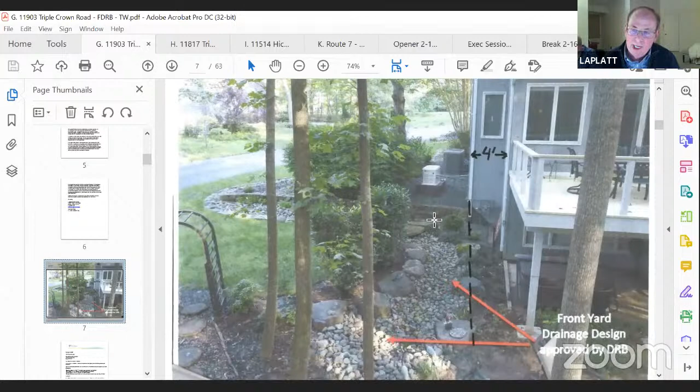And you will see that in August, to bring you back to where we were, on August 18th, the DRB heard our appeal of the panel decision regarding the location of deck stairs. It's the 5th time the DRB, 4 times in the 80s when this house and our house adjacent were built, the deck stairs issue and location was settled by the DRB, and it was supposed to be exactly where I'm showing it now. And each time the issue came back again, in May, when the panel first considered an application by the current owners who had moved in the year before to put the stairs on the other side. The panel took it under advisement and approved it, and we said that was wrong.

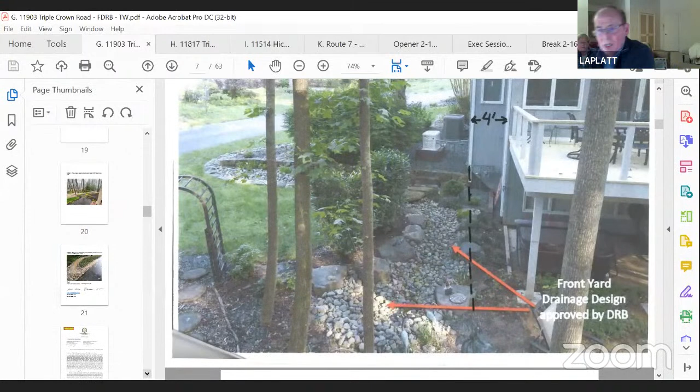On August 18th, the full DRB with you in charge, Mr. Wood, said in a resolution after discussion that the deed governed, and this was a settled issue. There were no changed circumstances. And so the McGurks should go back and redesign it to have the stairs where I'm indicating it now. Instead of doing that, the actual motion said: make a motion to ask the applicant to restudy and resubmit the updated design with a stair location on the west side of the property per the deed.

In October, the McGurks submitted another application, but they stood with a false statement that it was impossible to put the stairs 4 feet wide in a location where the DRB had mandated it now 5 times, including the August 18th decision. We then got a submission from Mr. McClarity on behalf of the McGurks.

This is his photograph showing supposedly the impossibility of locating the deck stairs there. We took that photograph and added the 4-foot notation per the plat that shows the footprint of the house, with 4 feet wide. There is no physical impossibility to satisfying the requirement of the settled issue of the location of the deck stairs on the west side of the deck, adjacent to the deck.

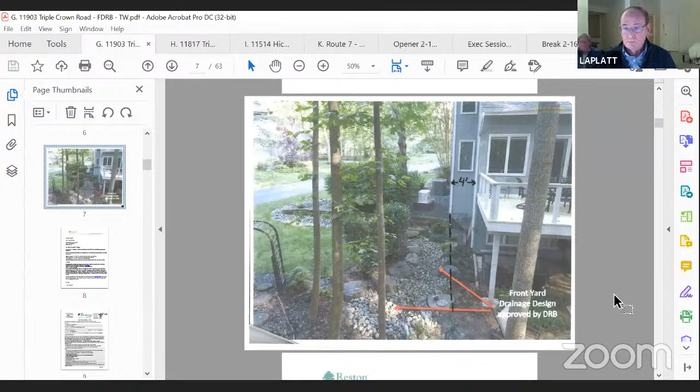Okay, thank you, sir. So to be clear, the new information — are you claiming there's new information that the steps could be constructed on the west side of the property? Is that basically what your new information is? Mr. Wood, at this juncture, absolutely, because the McGurks based their whole argument that it was impossible to do it at that location on the fact that it was physically impossible to locate the stairs there. And that literally is false.

And just a question — is this your opinion, or have you had an actual contractor or architect look at this to determine whether it's possible? We've had multiple people look at it, and you can look at it with your own eyes. That space is 4 feet wide. It's clearly not in the channel. There may be one or more pipes there, but they are outside the 4-foot dimension of every stair that's been proposed. You can see it with your own eyes — the facts are right there. And the restrictive deed is supposed to be respected unless there's a physical impossibility or massive change of circumstance, neither of which exists here.

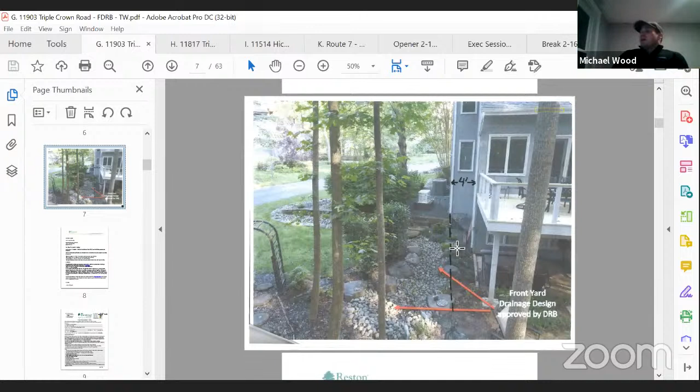So does anybody on the board, Mike B, do you have any questions or feelings about the appeal? I mean, I don't have any additional questions. I understand

the appellant's point. I understand what they're bringing to the table. And again, as the chairperson just brought up, it's a question of whether there was a design guideline misapplied or if there's new relevant information. I think we were aware of the dimensions in play. So I don't really have anything else I'd like to add at this time.

And sir, Dan, did you have anything to ask? Dan, are you on? Yeah, I see you there. I'm on. No questions. Okay. Karen, did you have any questions? No, time to move on. Scott, did you have any questions? No.

And then did Bruce join us? I'm sorry, no, he has not joined us. Okay.

So as an appeal, I understand that the way we reviewed this is that we reviewed it as a new application, and the argument is that a DRB application, we reviewed this as a new application, not as an amendment to an application that was approved 30 years ago. And I think that's how we looked at it when we did approve the deck as a design being aesthetically complementing the house.

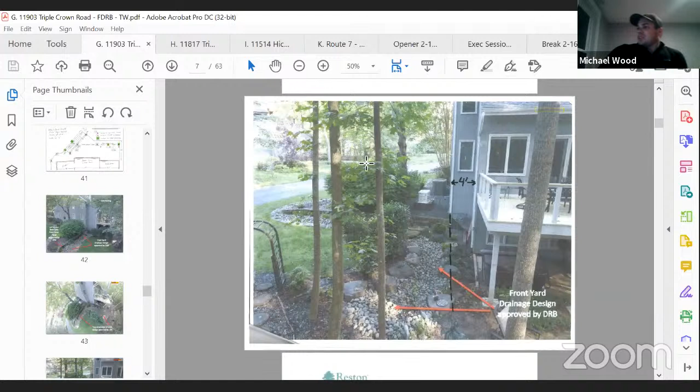So what's tricky is I don't know, reconfigure both the drainage swale and the deck stairs. Yeah, I mean, it wouldn't be. So I see it as new information that the stairs could be built there. I was always under the impression that they couldn't be, but is it really going to detrimentally turn the decision on the actual overall project design? Probably not. But that's all I have to add to it.

So does anyone else have any additional thoughts on it? All right, so let's take a vote. I will go down the roll call of what I have and take a vote.

So all those in favor. So Mike, are you in favor of the denial? I am in favor of the denial. Okay, Dan, are you in favor? I'm in favor of the denial. Yes. Karen? Yes. Scott? Scott, are you there? He's giving a thumbs up. Yeah, yes, I was muted.

Sorry. Yes. Okay. And I would actually vote no, just because I don't think it'll make a big difference, but I do think there was kind of new information, so I'll vote no against the denial of the appeal, but the motion still passes 4-1.

All right, so since the appeal has been denied, we will move on to the next application. Application H is for 11817 Triple Crown Road.

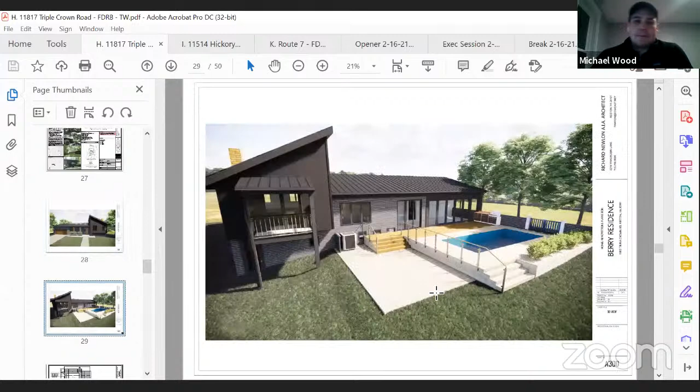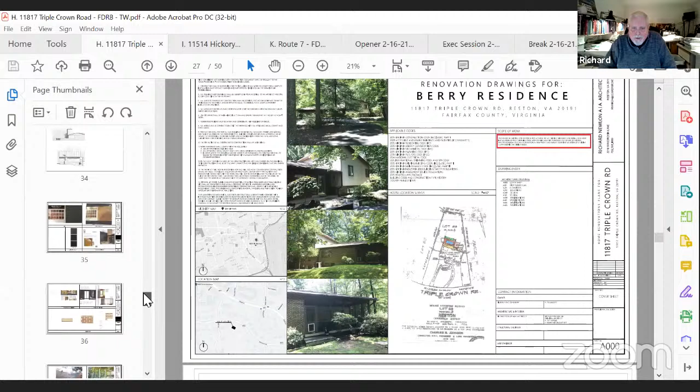We have a house here that was built in 1970. The Berries purchased it in 2004. Basically, nothing has happened to this house in 50 years, if you look at it that way. So there are two phases I'm going to talk to you about. The first phase is trying to bring this house, it's a heavily treed lot, and the top picture is looking back at the house from the street. There's a U-shaped driveway that goes in, and it has lovely yellow siding on part of it and a reddish brick on the rest. The first challenge was to update the house and bring it into the new millennium with a different color palette and certain materials, but with no visible shapes changing on the outside.

Given that, and then the second part, or same part of it, is there some new work being done that we'll go into? We have all the materials listed and so on. There's a list of about 50 things that'll run down the side over there. But basically, let's look at the new palette first to change and update the general aesthetics of the outside.

We're changing all of the siding, the angular element, if you go back to some of the basic drawings of the house, like right there, number 33. That's the house right now, although that shows some of the changes we're making, but you get the idea. On the right-hand side, we're taking off all of the siding and re-siding it. We're taking off all of the roof and re-roofing it with a standing seam metal roof. The chimney that matches the brick on the house, we're going to skin that with a half-inch thick lick-and-stick brick to change the color as an accent. It's a yellowish brick. We'll get into those samples in a bit.

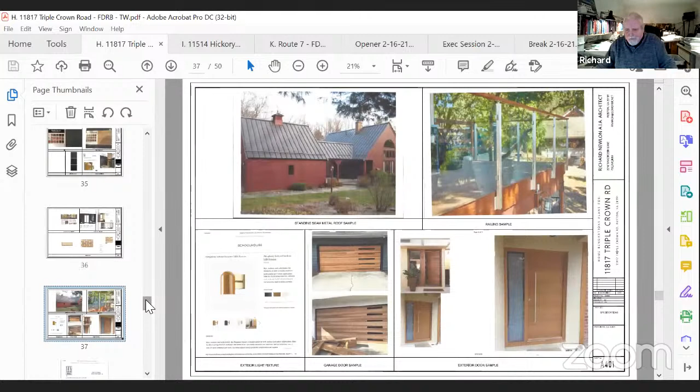The other elements - the chimney brick, the gutters, downspouts, light fixtures - we're replacing the existing light fixtures. There's a picture of the light fixture, it's a dome-shaped, rather small light fixture, kind of a can - not a can light, but it's in color butterscotch, which complements all the other samples we're showing. I didn't want to leave anything out. Oh, there's the light fixture, see the little bronze looking thing there? That's the light fixtures we're putting outside. The ones by the front door will be that, and we'll have those light fixtures on either side of the new sliding glass door in the back.

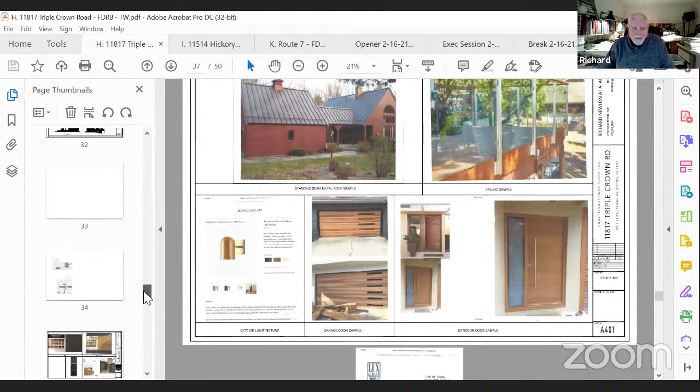And in the screen porch, which is the other part of what we're doing here, we're enclosing the screen porch. Right now the screen porch - and we'll get to the color renderings, it shows it a whole lot better - but on the rear elevation, well, I'll go back to the front. The front, we're replacing the front door, we've got samples of that.

We're replacing the garage door. We've got samples of that. We'll show you that when we come back to it.

On the rear elevation, a couple of things we're doing. We're adding that sliding glass door into the dining room. There's an existing deck off the master bedroom, but it's kind of unusable with the bugs we all live with around here. We're putting a roof over that, so it doesn't cover any additional space or change any patterns of getting water out of there, making it a small screen porch off the master bedroom.

There's a 3-part casement window there. Those are new windows in an existing opening that has what I'll call double hung windows now.

On the right-hand side, that's the existing screen porch.

We're doing a couple of things there. The screen porch floor, from the level of the existing house, is down about 24 inches, somewhere in that range. We're raising that entire floor so it matches the floor elevation of the entire house.

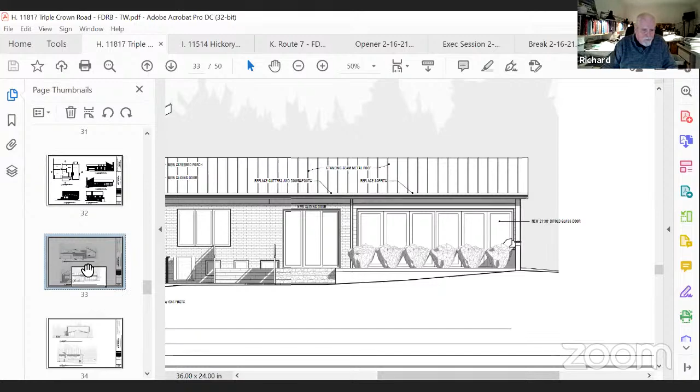The elevation change then—if you go back to one of the floor plans, that's kind of the whole outside of the house. We can go through all those materials; we've got all the samples there. If we can get to the sheet with the whole floor plan on it.

Yeah, there's another one I sent you later that had the pool equipment. There you go, that's the one.

The screen porch is the room in the upper left-hand area there, where there were steps down into it. That drawing shows you the bifold doors getting pushed all the way over, in this case to the right-hand side. We're coming out from there with the new 3-panel sliding glass door in the dining room, so they're all now going to come out and look out on a deck.

The deck—we'll get to that material—it's Zuri, is the name of the manufacturer. For once, we're not using Trex, and we'll get to the colors on that.

And the surround, the pool surround, is travertine tile. I'll show you those colors later. They all kind of go together, so it's going to be, I think, a rather attractive element.

Since we've now been able to put a doorway in the dining room, we're extending the deck of Zuri flooring across the face there, so the dining room can walk out. The screen porch—we've never decided what to call that room, it's kind of a family room, a study, whatever—it's going to be a wonderful room to have. All of those walk out.

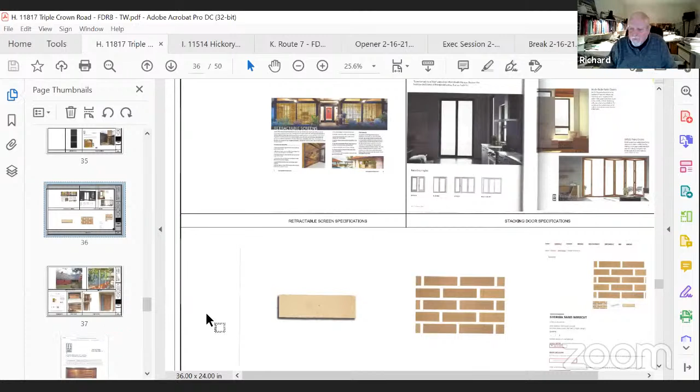Richard, one question. Where is that brick going, the more butterscotch brick? Because the renderings show all dark brick. No, it's the butterscotch. The butterscotch is the light fixture, Mike. What's that brick there that I'm looking at on the screen right now? That's only going on the existing chimney, to change the color of the chimney from a red brick to a yellow brick. Okay, that's all. That's it. All the rest of the existing brick is getting painted.

It's getting painted. If you look on number 35 there, you can see the colors of the Benjamin Moore paint. It's likely to be the darkest one of those. Gotcha, okay, that's all right.

I'm here for you. Whatever you need to hear.

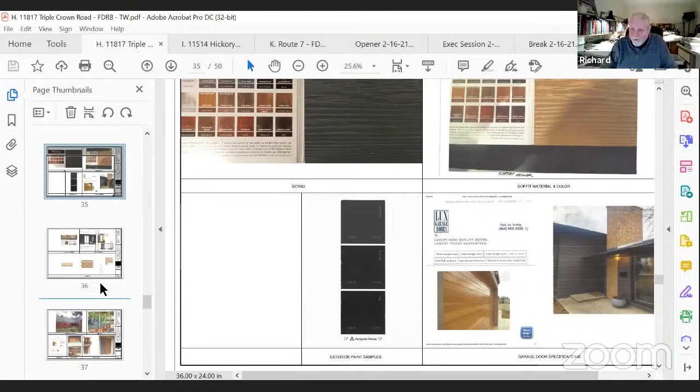Go back to number 37 again. That's obviously not this house, but that shows the kind of roof we're going to be putting on the house. It's a standing seam black metal roof.

The railing we're putting around the pool is where it says railing samples, strangely enough. It's a glass railing with some sort of chrome verticals on it and a wood rail at the top, and it will be only on that one side.

Like I said, if we go with the powered cover, then below that you've got the garage doors, sort of, I'll say a teak color. It's kind of a reddish color. I'm not exactly sure what the wood is, but that wood and the glass slots in it will match the front door. The front door is just off to the right.

Well, there's one right next to it with the handle and everything else. The side light just replaces the door and side lights that's there. Well, let's go down a little bit there. Well, there's more on the door. You got that.

Oh, and there's the travertine. That's the two colors of the travertine. Okay, yeah, that's good. We're most likely going to use the more yellowish one, travertine number one.

And on your right-hand side is this new material we've discovered. Pardon me, it's like Trex, a man-made material, and we're going to make the deck out of that. It has the same life expectancy as Trex, which is a hundred years or whatever, however long Trex is supposed to last. And we're using the chestnut color.

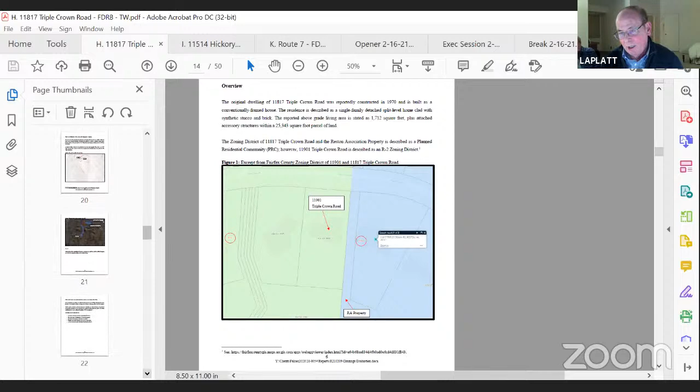Regarding privacy, we think that the pool part of the application looks to us to be very nice. We are concerned about the size of the overall application with the patio part. And we wonder if you couldn't reconsider and put the patio adjacent right behind or in some way integrated with the pool part, so you don't so heavily, like 50 by 30, cover the area of your backyard. We would ask you to consider that.

We know you spent a lot of time on this, but for drainage alone, that would be a massive improvement in the situation, particularly as there's no privacy consideration for us by glass panels on the side. We would ask you to think about some kind of opaque or other shielding. For the record, I'm looking at what the restated deed says: you're supposed to take into account, when you do an improvement or addition, the impact of noise, exterior lighting, drainage, privacy, and other factors.

The patios and walkways section says you're supposed to mitigate the impact of presence or use on neighboring properties. Same thing applies to swimming pools. We do appreciate very much that you're putting the equipment on the other side of the stone wall, and that will be tremendously helpful to us.

We also appreciate that you want to mitigate the impact of the presence of the deck on us and have something beautiful in your backyard. We don't have any issues with that, but we would ask you to reconsider having a large patio adjacent to a very large pool area, neither of which are there now. When this house was planned, the screened-in porch was supposed to be the outside area. So we're asking you to consider that, and to come up with plans, because there are none that we've seen on drainage, privacy, or noise, other than the use of the pool.

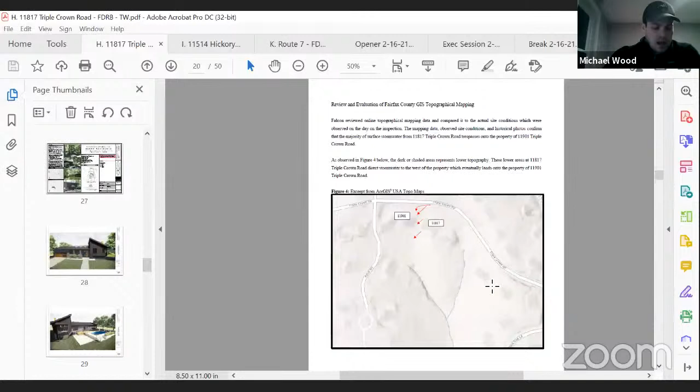I know I have some of your same concerns, especially about the drainage. So let's go through the board's questions for Mr. Newland. Mike B., did you have any questions about the design, or anything else in reference to the application?

It was addressed partially during the initial discussion. I was going to ask about fencing, especially with regard to the pool infrastructure as it was going in, because the renderings weren't really showing the full ringing of fencing that I was expecting for an in-ground pool structure. So I was very interested to hear about that cover system and how it might mitigate that potential impact.

That's really interesting, and it's per code—something Fairfax County allows. That's what I had a question about, because I know the code typically, if the pool abuts a house, the house has to have either alarms on the doors or the pool needs to be covered, like you were saying, Richard. But if the rest of the yard isn't fenced in, you still need a fence around the pool, at least for the other three sides.

So even if you do have an automatic cover—well, that was my understanding originally too. Back up a second: the whole yard is fenced, but it's a rail fence, 4 feet high, that doesn't really count, but it is fenced. When I discovered this in the code, I was as surprised as you guys are—it has to meet an ASTM standard, which I think these covers do, and it has to be a powered one. So at night when you go inside, you push a button, it closes the whole thing, and then you're not required to have a fence all the way around.

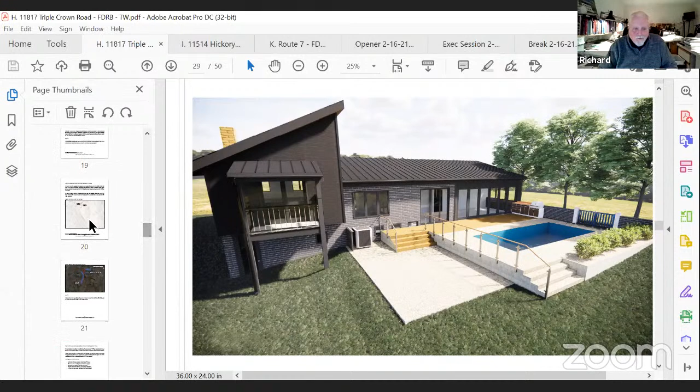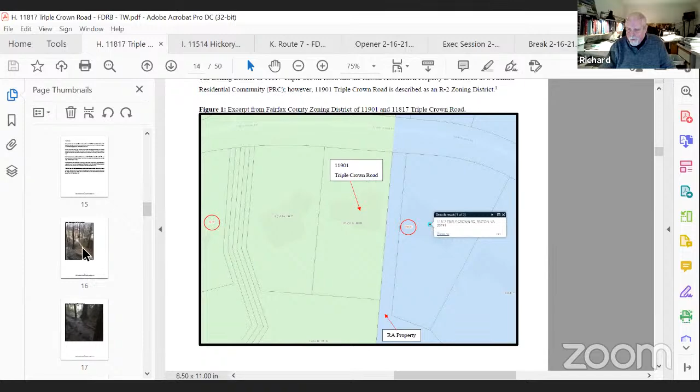The other couple of things just to address, and I think Mr. Berry can talk about some of this too. There's a chunk of Reston property back between the Platts and the Berry's house. Back in 2018, they had a whole lot of back and forth and studying about what they did with that, and they created a whole drainage solution to most of the drainage issues. We may, with this pool and the patio, create some minor drainage issues on our side, away from the Platts property, away from the Reston property on the other side, where they put in a massive drainage area with troughs and berms. There's also, in terms of a privacy issue, I understand from the Platts' point of view there are a lot of trees over there. We'd be more than willing to plant a whole lot more in there to create more privacy on that side.

That's the Reston thing, that's where everything goes now. We're on the far side of the house from where all that is, so I don't think we're creating any major drainage problems with that. The privacy thing we could probably take care of with some landscaping. If it really is a huge issue, we could even entertain the possibility of redesigning that lower patio, making it smaller, and just have the stairs coming down there to the backyard. There are things we could do with that to tweak it a little bit, but we really would like to be able to move ahead with this project, to say the least.

Understood. And you kind of touched on one of the other items I was going to ask you about, which had to do with the specific pipe stem, for lack of a better phrase, for the RA property that sits between the two parcels in question. Right, this is RA property. This is not a drainage easement, correct? This is correct, RA property.

So, correct. And if I read this correctly, and I went through it in some detail, this was a proposed and constructed drainage feature with RA's buy-in and involvement in the design and implementation, correct? Correct. So this was to hypothetically address what drainage concerns occurred or were previously in play along this borderline, correct?

Yes. Okay. And the scope of the renovations we're talking about, we are not affecting grades in the front of the home, correct? Right, we're not doing anything there except the doors, and that's it. That's all we're doing out front.

Okay. And again, I reviewed the GIS and the topo mapping that Fairfax County's got available, which it looks like the Falcon report also presented, but shows a rather unclear rendering. The topo drains, again, from the top of the rendering to the bottom, so from north to south. And again, you're not affecting any of the drainage upslope, right? So we're only talking about doing any sort of earthwork operation in the southern piece of the parcel, correct?

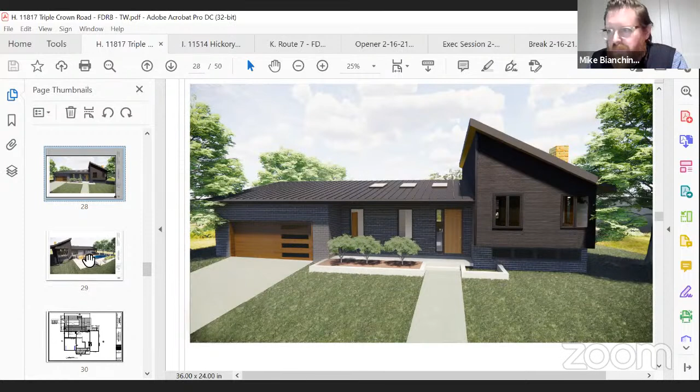Yeah, the only place we're affecting it is directly behind the existing screen porch. So really the pool infrastructure and what's happening in the backyard shouldn't have any detrimental impact to the flow in those photographs, correct? All the drainage issues are on the other side of the house, I guess. Is that the east side, I guess, the west side? I can't remember. West side, yeah. Okay, and we're up against an existing brick wall on the other side.

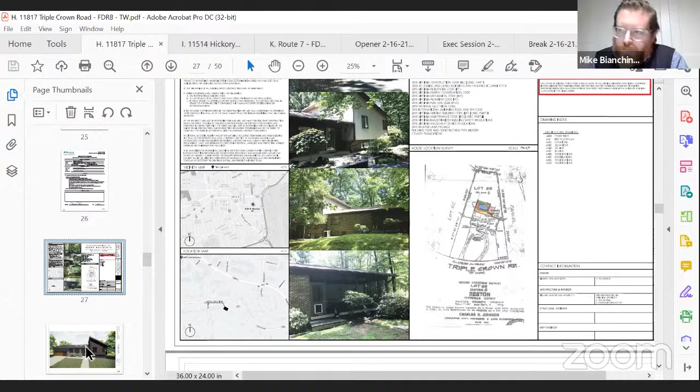So there is some, and anyway, that picture you showed of all the drainage coming through there and going onto the RA property, that's what happens, yeah. Okay, but again, that water's flowing from the north. So I just want to make it clear and ask you specifically that we weren't doing any earthwork operations, any land disturbance, etc., on the north end of the parcel that would be flowing into the swale. Not changing anything in the front driveway, everything stays the same. Okay, so from that standpoint, I think, Michael, I'm good for now. Okay.

And I just want to tag off of that grading question, Richard. Have you guys looked at the disturbed area with construction and access to the site to the back? I'm assuming it's going to be over 2,500 square feet based on the size of this. Have you guys talked to a civil engineer yet about that?

The in-ground patio, basically.

Oh, Richard, are you still there? Richard, are you still there? I think he froze.

Yeah, because what I calculated is, yes, it's 1,200 square feet of improved area, but if you do the 10-foot buffer and then a 10-foot access easement from the front, to me it's pretty darn close to 2,500 square feet. So I'm not sure whether the county's going to want at least a conservation plan at the minimum, maybe even a grading plan.

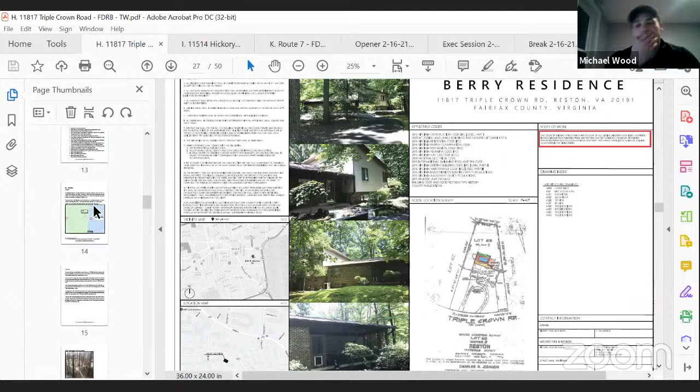I don't know if he can reconnect, hopefully. Is there a way to let him know he's disconnected? Yeah, I'll send him a message. Okay. Well, in the meantime, let's see if he's reconnecting.

I don't know, staff. We've never had this happen before. What do we do? You can go on to more. Should we just? Well, I mean, I don't want to move on. I'm sure I can go through and just see if anyone else had some discussion. Yeah, that's what I would do. Okay, Dan, did you have any discussion items? And then if there's any questions for Mr. Newland, we can ask him when he gets back.

Do you have any thoughts on the design? I like the design overall. I think my two questions are probably for Richard, because one's just clarification on one of the drawings that says slate on concrete, but then he also has some tile that he referenced verbally, shown as an example of what's going in around the pool. We'll hold any questions you may have, because I'm hoping he'll join back, but I was wondering if you had any thoughts. But it sounds like overall you're a proponent of the design.

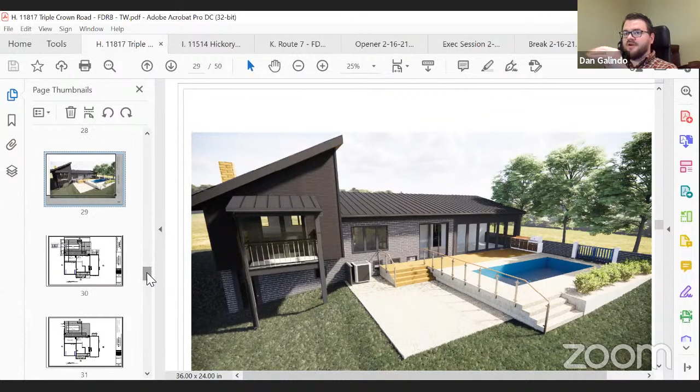Yeah, I mean, but I do see where you're talking slate on concrete. I see what you're talking about. My only slight concern would be, like you're indicating, some concern just over drainage and stuff, but otherwise I think I've got two clarifying questions for materials and architecture type things.

Okay, well hopefully when he comes back on we'll be able to ask those. Karen, did you have any thoughts on the design that you wanted to discuss? No, I'm happy with the materials and the design. My concern is the grading. Okay, well hopefully he'll come back and we'll talk about that.

Because there's some very strange kind of lumps that look like people have tried to... It sits on a very high mound, and I'm just wondering if that were to be softened, maybe the pool is a step down, or something a little bit more interesting in the elevations of the backyard.

So anyway, it does look like there was a weird... maybe are the Berrys still on? Are the applicants still on? No, something happened to everybody. Sandra just noticed, there's Kim Berry. Let's see if she can tell us what happened. We had a blackout. Oh, there's power. Power went on, huh? Can you guys unmute the Berrys real quick? We're doing it.

I don't know if she can. Because she should be able to now. They said they had a blackout. John, if you want to try to unmute yourself, maybe you might have. Oh, hey, there you go. Yeah, sorry about that. Hey guys, sorry.

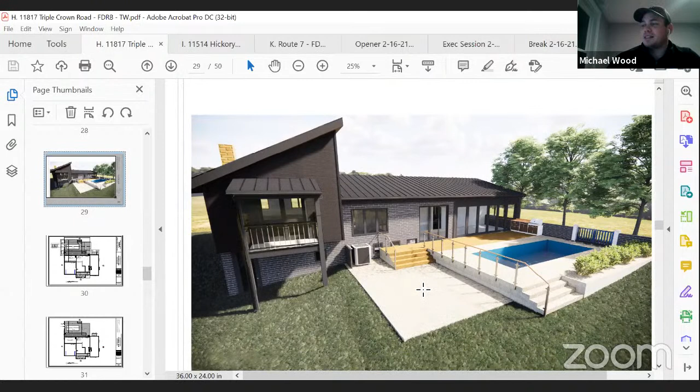So we lost Richard, we lost you guys, we lost everybody in that area of Reston apparently. So yeah, everybody. We were having some questions about what it looks like - there's these kind of humps in the backyard that exist already, and we're curious where they came from. Were those there when you guys moved in, and do you know what they do? What was the RA solution for the drainage? Has it helped? Has it really not done much? Kind of what's been your guys' thought on that? Oh yeah, no, this is a good point. We haven't changed anything, basically we went through.

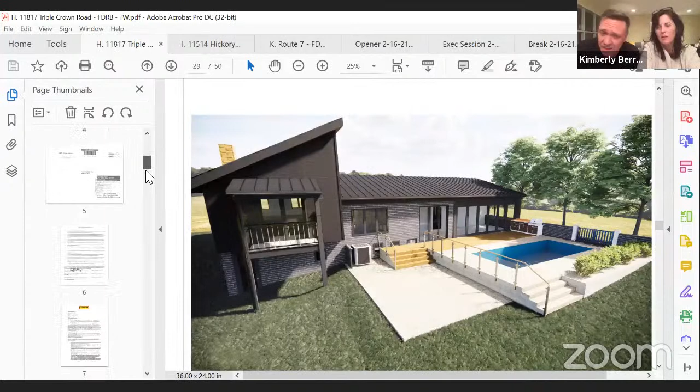We talked to Trevor - we had basically gone through all the drainage stuff earlier in 2018, like 8 sessions between the board and the covenants committee. It was ultimately dismissed. We had soil experts on both sides. Basically nothing has changed, it's the same. We're not trying to change anything on that side of the house. We're trying to be cautious in putting together a plan so we could enjoy our property. We have 2 daughters who'd really like to enjoy our backyard, and we're excited about doing this, but we haven't changed anything. Those humps have been there since the beginning of time, I think.

Gotcha, okay, so I just wanted to make sure those humps weren't part of the drainage solution.

Hey Richard, everybody's going to lose power over there.

So we were just talking about - I just wanted to make sure the humps that are in the backyard weren't part of the drainage solution that was presented 3 years ago. It sounds like they're not. They've been there forever, and whether they were approved when they were put in, I don't even know if you need approval for whatever they did.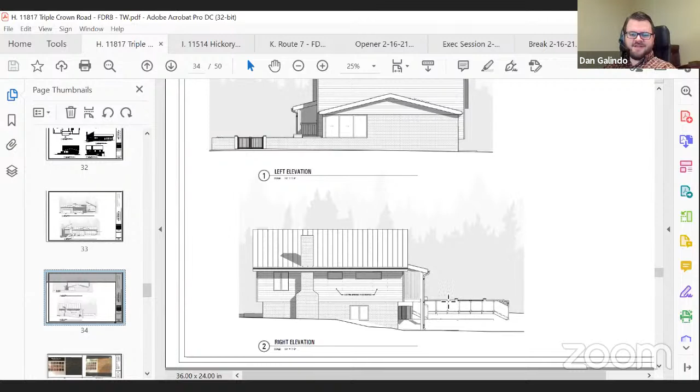It's the tile, okay, it's an old note. Sorry, okay. And then on sheet 34, on the right elevation, it seems like there might be just an artifact of something that's over the little patio in the back, the deck. Yeah, there's like a panel with vertical lines. Is that intentional, or is that just - that's going to be sort of a privacy screen, vertical slats, which also would keep the - adds to the privacy for the Platts next door and anybody sitting on the little porch. Okay, so that's just going to be wood that generally matches the other wood shown here?

It'll match the siding, it'll match the HardiePlank or the other one we're talking about. It'll be the dark color, yes. Okay, all right, thanks, those are my two questions, Michael.

Karen, I know you had a couple questions as well for Richard. Pardon me, yeah - I was commenting on the sort of the hump that the whole back of the pool and back patios are sitting on. I'm just wondering, it's very strange, and I think from the information presented, it was probably done by previous owners for some strange purpose. But it's sort of like a site that has topography, but the design is completely flat, and I find that a little bit like something is missing. I don't know why that area is raised.

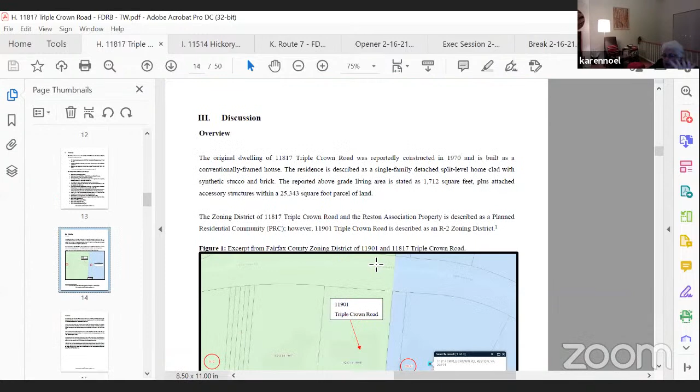According to some of the history that was presented, this part of the site actually drained to the east rather than to the west. I've been trying to figure out how it did that, but it's something about this hump. Any of the water coming from the front, Karen, goes down the side of the house and follows along the outside of that existing brick wall, which extends out, I'll say 30 feet, something like that. So any water coming down that side of the house doesn't even hit our back. I mean, it's on our property, but doesn't hit the backyard until well after the end of that existing brick wall. If that makes any sense to you.

Well, I can only try to imagine how it drained to the east, but it just seems like everything wants to send more water down to that ravine, which is a big deal. Well, yeah, most of this whole thing that happened back in 2018 or whatever, the majority of all this, and they had that one photograph that showed all the water running between the Platt's house and the Berry's house. Almost all of that water is draining into this new rock swale that got built a couple, 3 years ago, whenever that was. Oh, yeah, so that's a humongous thing. Yeah, it is. Yes, it is.

It's unnatural. Yeah, well, it's on RA property, so go figure, right? That was a joke, never mind. I'm kidding. That's because there was the only place to put it, and they entered into an agreement that the neighbors pay for it. Right.

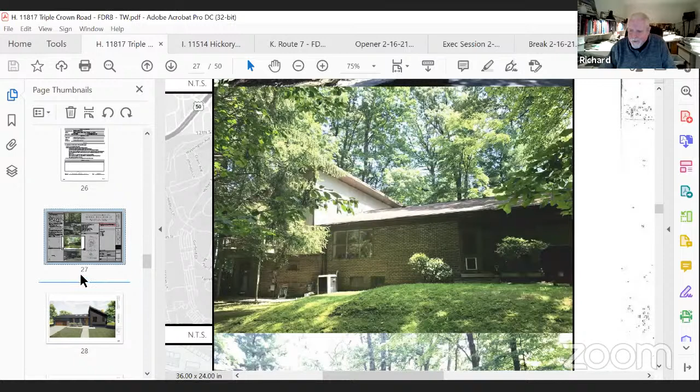No, well, no, I don't think so. I think the stuff coming down the east side of the house goes all the way and is directed into the backyard. It doesn't go across the backyard into that swale. That's right, it all, correct. The topography would bear that out. The water contour lines indicate that as well. The house drains straight to the back of the backyard rather than to the swale. It goes to the correct, you can see on the site plan you're looking at there where the brick wall goes and extends all the way out some 30 plus feet.

So any water coming down that side, most of the water comes down and goes in between the Platt's house and the Berry's house off to the west side there. What little drainage there is between lot 63 and lot 62 comes down between those two houses, but it's pushed off into the backyard because of that existing brick wall, I guess is what I'm trying to say. Doesn't the water coming off of that large elevated, whatever you call it, generally push it off to the west, and you want it to go to the back. There's a huge depression back there, a huge ravine, and that's where you really want it to get to.

Right. I think all the water coming across the front from the north is directed into that swale. All the rest of the water, the site basically slopes to the rear. Okay. Yep. So any water coming from that hump, as it were, or anything we're doing, is not necessarily going to drain over to the west. It's going to drain straight out the back into the back area. It also has a part of it that actually turns, the slope goes off to one side as opposed to straight back.

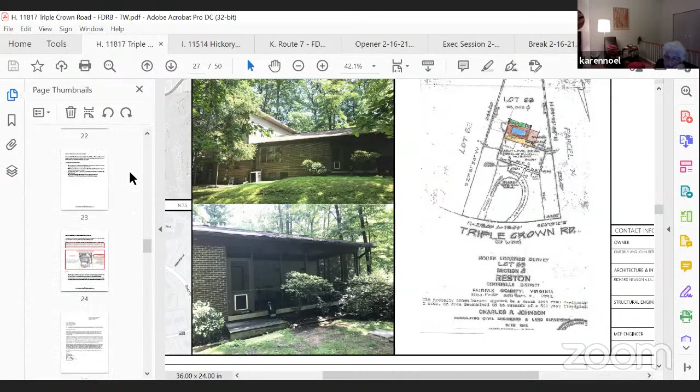Anyway, it's just a concern that I find discomforting. Okay, yeah, I mean maybe it's just because I've been able to walk behind the property, but when you look at your elevation on sheet 33 on the rear elevation, there's a big slope from right to left on the back of this house. It's higher up at the screen porch and then goes underneath of the elevated screen porch. To me it's clear there's an elevation change from right to left, but maybe I'm just, I think at the end of the day, Richard, from my understanding of the 10-foot surrounding area and then having a 10-foot easement access to get to this backyard, you're probably going to need at least a conservation water drainage plan with the county just to show them where you're directing the water.

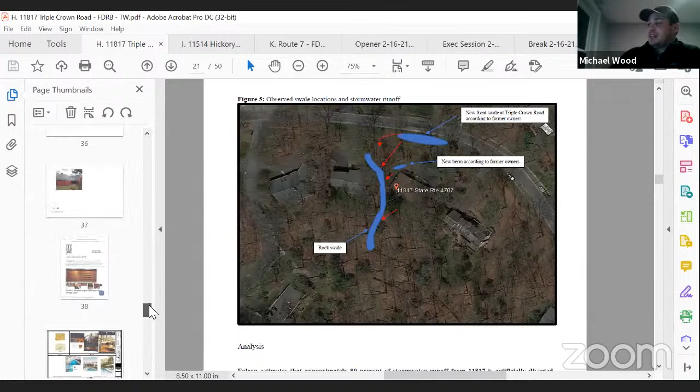So I'm just giving you the heads up, and I think it would be helpful for us to see some sort of plan where all this new impervious covering is, where the water is sloped to, where these patios are graded, what the slope is, and if anything is going to be hard piped, where it's hard piped and where it's discharged. We can do that, I think that would be helpful, because you're adding a pretty substantial amount of impervious area.

Karen, did you have anything else besides the grading? No, that's really the source of any discomfort that I have, and I would think it matters to be a little bit more careful and thoughtful about that.

Okay. I think when we get ready with the permit drawings, we can come back to you with the grading plan, if that's okay.

And I guess also, is there some way you might have a little bit more dimension to the surface of the pool and the things in the backyard? I just feel like it's a blanket instead of something that is living. Anyway, we can straighten that out.

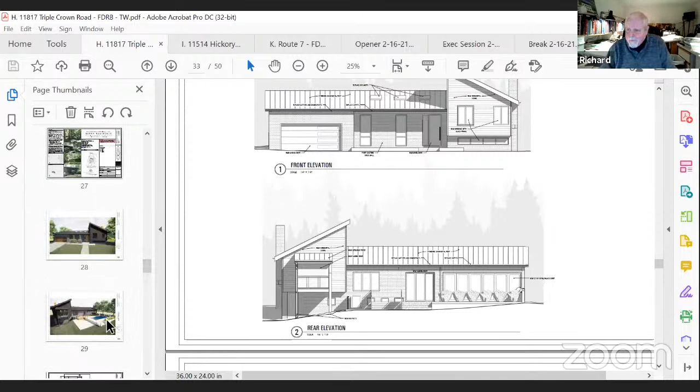We'll get a grading plan together and show the flow of water on that side of the house. As I said, mostly it's directed by that brick wall that extends so far back, and the pool itself is going to capture some of this water. But yeah, we'll come back with a grading plan. We're almost to that stage with the drawings now.

So I spent some time looking at that, and unfortunately it wasn't raining, so I had to imagine it. All right, thank you, Karen.

Scott, did you have anything? Yeah, one quick question. This right here, is that existing? There's an existing deck there.

Okay, all right. And can we go to sheet 34, please? It has the elevation. So this right here, just to be sure, Richard, is that the HardiePlank turning? Yes. Okay, we're just putting vertical slats of HardiePlank that'll create a privacy screen on that side. Okay, but it's consistent with the front, same dark color, same everything? Yes, sir.

All right, okay. And I had another question. So the brick, you had the peel and stick. Is that existing? I'm imagining it's an existing masonry cavity wall on the building. Are you painting it? It looks like it, and it could be my computer screen that the color is changing from existing to new. Can you elaborate? All of the brick in the house will be painted that dark color.

Okay, that's gonna be okay. All of it except the chimney, which is an accent. We're going to put peel and stick brick, about a half inch thick, over the whole chimney, and that's that yellowish color. Gotcha. It's an accent that kind of matches the color we're putting for the soffit underneath. We didn't get it, but there's a sample showing what color the soffit is. Yeah, no, it's a very thorough application.

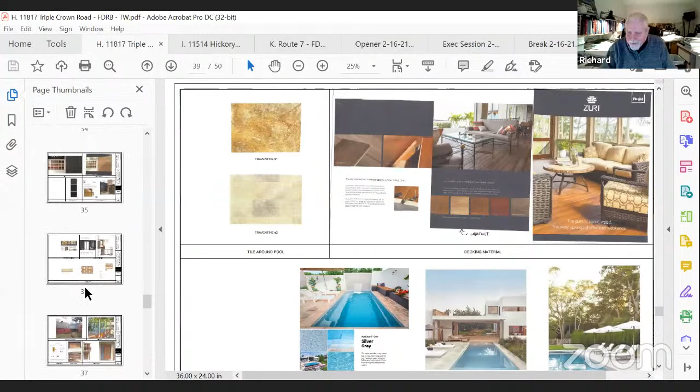So the glass railing too, again forgive me for diving into this, not a criticism, but with the pool splashing, are you holding the glass panel off the surface? It sits off the face by about 1.5 inches. Okay, awesome, so you could squeegee the whole thing right underneath the railing. That's exactly what I was thinking. Okay, thank you so much.

I wanted to add one other thing, that there was mention made about the sound and noise that comes from a metal roof. For 30 years I've lived in a house with a metal roof, and all of my neighbors have metal roofs, and we don't find that to be an issue. So I just thought I'd mention that. Thank you, good, okay.

Scott, did you have any other things, or is that it?

I love the garage door. Great, us too. Seconded.

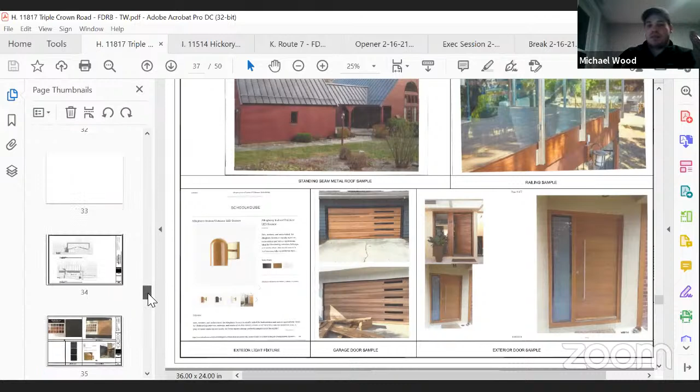So I have a couple questions, Richard, on the back. What I'm worried about is that on the front you have this accent of wood, and I think it keeps the black from looking too black. What's a little deceiving in this rendering is if you paint all this brick black or a dark charcoal, those white grout lines won't exist like they show in this model, so it's going to be dark, dark, dark.

So is there any way on the back elevation that we can introduce some sort of wood element somewhere that pops the back a little bit so it's not so... I'm picturing the house that's on Ring Road, I drive by it. Sometimes I like it, sometimes I don't, depending on the time of day and how much light is outside. I'm trying to figure out if this is just going to be too dark, and if there's anywhere we could introduce some wood elements on a vertical surface to help break up the back.

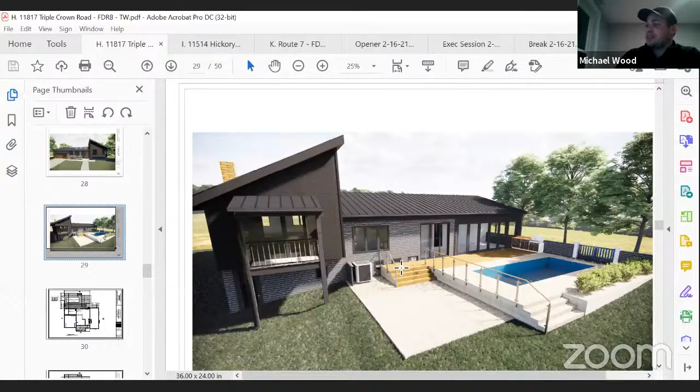Because the deck from this angle is a good start, but the problem is you're not really going to see that in the vertical plane, it's going to be pretty much all horizontal. Maybe there's somewhere on the screen porch or something.

One thing we haven't focused on too much is that underneath the soffit is going to be a color very similar to the deck, so you're going to have this kind of light golden band. The overhang is about a foot, maybe more, so when you're standing on the ground, not in a helicopter like the rendering, you'll see that goldish band running all the way around the house, and I think that'll help a lot.

And does this little bump out on the back, where the screen porch deck is, underneath that also get the same under-soffit treatment? I'm assuming it overhangs the brick a little bit. It looks like the roof out on that will have the same soffit accent. Is that what you're asking?

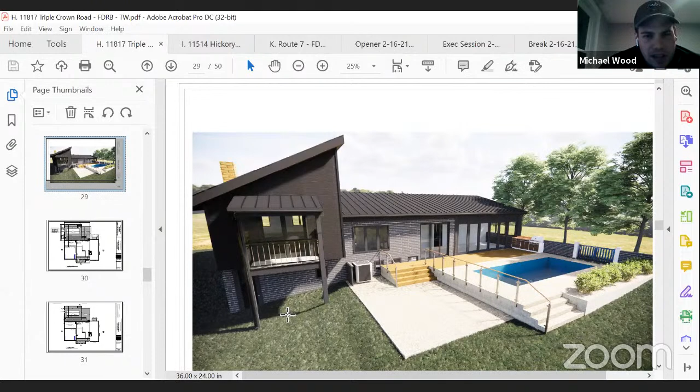Yes, like where that cantilevers out. The main roof, the big sloped roof, will have that gold soffit underneath it. That's just a deck, the floor of that will match the deck - the Zuri material - so you'll have that as a lighter color there as well.

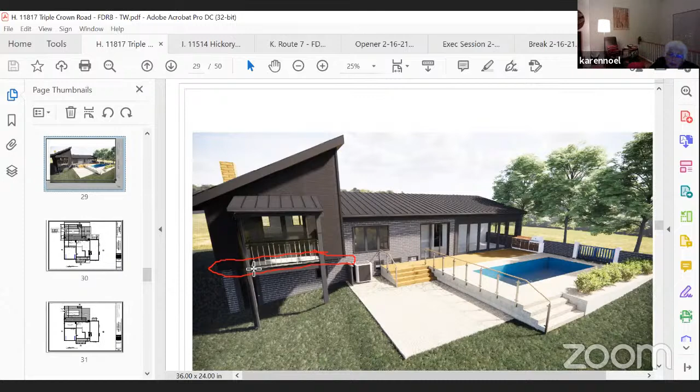What color is the underside of the roof over that little poke out there? We don't really have an answer for that yet, but we could paint it the light golden color to match all the other stuff. It would warm it up.

The only other question I had is any lighting - is any lighting proposed for this application? I haven't seen any lighting. They're not on the rendering, but as I said earlier, there'll be those little schoolhouse lights we had a picture of. There'll be one on either side of the sliding glass door we're adding to the dining room, and one on the other far side of the screen porch opening.

There's an existing light outside the little deck we're turning into a screen porch, which will have a light like that on it. There are two of those lights out front too - we're replacing two existing lights at the front with the little schoolhouse light. So there'll be about 6 of those lights around the house, 2 in front and roughly 4 in back. I think it'd be helpful to put those on a plan so we can see where they are, and so RA can make sure that's what's installed.

Do you plan any lights on the steps at the rear? Because I believe there are 3 treads, so by code you're going to need a light out there.

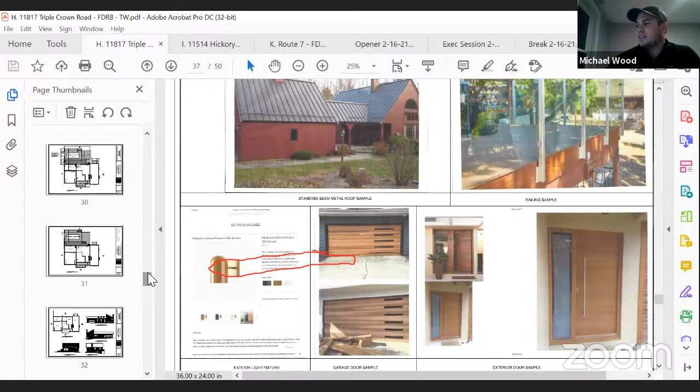We'll add a light to that. Yes, okay, so just maybe one in the tread or something to help light it up, or maybe on the side or something. So just maybe a lighting plan I think will be helpful.

The other thing is when I'm looking at the rear elevation, this is a perfect example. You have these 3 rear basement windows, and you're now blocking them. What is the plan for that? Because that looks very janky there.

We're probably in reality going to move that little landing over enough so that it misses that one window next to the compressor, but the other ones will fill in. It's a storage room in the basement. Okay, so those will go away.

All right, I think it'd be nice to update that. I think from a screening point also, I do tend to agree that there's no, did you put any screening around the equipment? It's backed up. It's just outside that brick wall. Right, but is there any screening around it from the neighbor? I know it's screened from them who will be using the pool, but what about the other neighbor on that other side of the property? Their garage is on the other side, no windows. But it's still someone else's property, so it's going to make noise.

I mean, we usually require pool equipment to be screened, so I would recommend some sort of bushes around that. Yeah, we can add that. Just some sort of landscaping. I think a landscaping plan would be helpful. I can't imagine all this is going to go in with no landscaping, there is some shown here and there. Maybe just add additional bushes where they actually are planned, just to make sure we capture that on the plan.

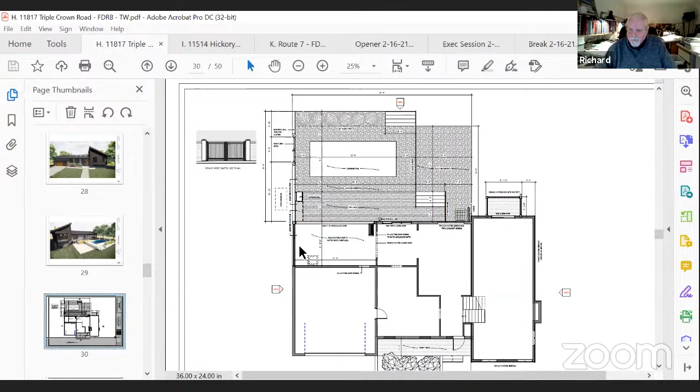Can I just ask a quick question? We'd like to be able to move ahead with this and the permitting process and all that stuff. If we could get some sort of overall approval with the statement that we'll come back with a lighting plan that won't be any different than what I just told you, where we're putting lights, the grading plan or conservation plan and a landscaping plan. But that way we can get on with the architecture and the permitting process. If we can, the motion could somehow say that, that would be much appreciated.

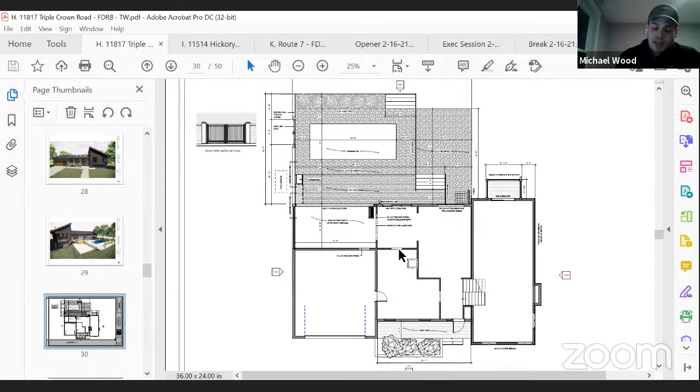Yeah, I mean, I think we can give you a design concept approval. And you have most of your pictures and everything, but yeah, because those obviously you're going to need at least the conservation plan for the county. So, are you saying you want more than an in-concept approval? Because I think the design everyone is behind. I think the design is good. I think it's just more of some landscaping, the grading, and some lighting plan that's really the main detail that we need.

So way back historically, we can give an approval, with the stipulation that we still need to get those. So if those come in and we feel like we need to adjust something, we might need to adjust something, just so you understand. That would be good. Okay, yeah, and it was part of our idea anyway, that we needed to do those things anyway. But if we can get a final approval on all the architectural stuff, we can come back with the landscaping plan, outside lighting, and the conservation plan. Sure. Okay, does anybody have a motion?

So this is Mike B. I'm curious in terms of the mechanics of how we want to do this. So it's not an in-concept approval of the package. This is going to be, how did we want to handle this there, Michael? I guess I'm struggling with the wording of how we want to do it.

I think what we can do is just say, and I can make the motion. I would say we motion to approve the application as submitted with the following amendments and requirements: that the applicant provide a stormwater/grading plan, a landscaping plan, and a lighting plan for final approval. And then I would also recommend them to update the drawings with the couple of clarifications that the DRB had pointed out in regards to the windows and the railings and some other things like that, just to make sure that the plan is all approved and it's cleaned up.

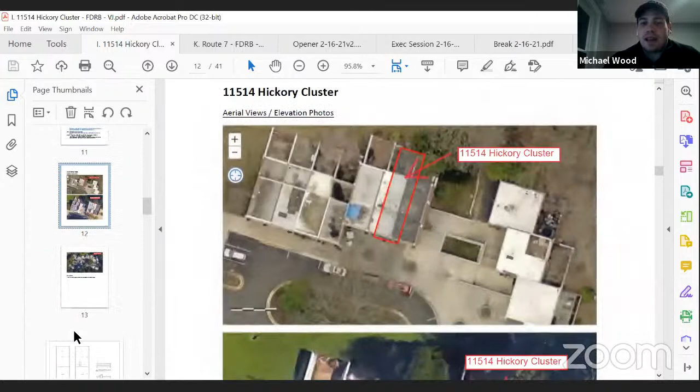Great, thank you, Tony. All right, so now we're moving on to 11514 Hickory Cluster. We have, are the applicants here? I apologize, I cannot pronounce your names and I don't want to butcher them, so I'm sure staff knows who the applicants are. If you guys could introduce yourselves and we will move from there. They're unmuting. Okay. Go ahead, please. All right.

So perhaps the applicant, Sanani and Brunilda. Yes, we're here. Great, could you guys present your application, please? Tell her what.

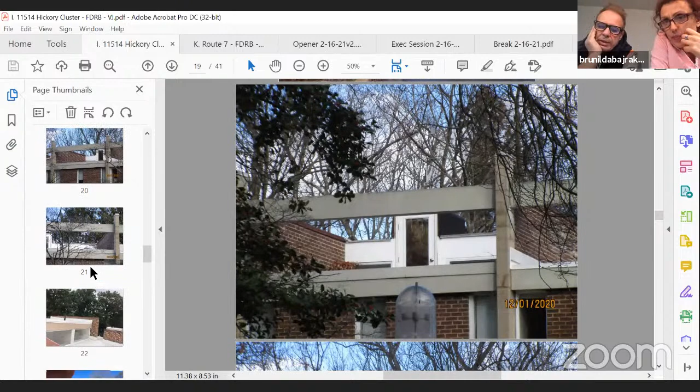We just added a door up to the roof to get access to the roof. Yeah, right here. Okay, and it seems very necessary for people to go to their roof. She means a flat roof, needs maintenance all the time. You have no other way to go there. Just if you have a 40-foot ladder, you may fall from the ladder. So.

Okay, and then were there other - it looks like there were other improvements, a tile floor there and some flower boxes as well. Yeah, made it more beautiful, more clean. If you see before and after. Still, the project is not finished because you guys sent out a stop order. But after everything is done and finished, it's going to look like a loft in New York, not in Reston. Okay.

So is that all you have to present? Yeah, the lady has physical problems, so she cannot go through the ladder to get to the roof for cleaning and whatever she wants to do on her terrace. Her idea and everything built here is according to the codes. Everything is open, it's not closed. If it needs to be inspected, it's open, nothing is finished from inside. So everything stands as it is right now, waiting for you guys. What you gonna say? We just did the door. That's all.

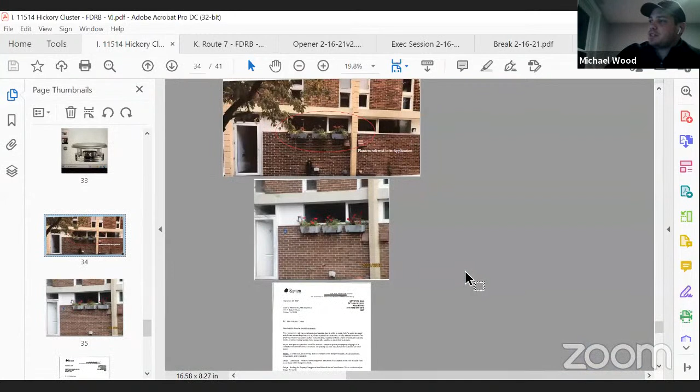Okay, yeah, I just wanted to make sure you guys had time to present your application because I have to go through the affected parties on the application. So I just wanted to make sure. We'll come back to you and ask you any questions that you have.

But I guess there's the planters as well that are part of your application, on the front of the home I believe. So that has to be discussed too. Really? Yeah, it's part of the application. So what material are they? What is holding them up? I can't quite tell from the photos.

It's a metal bracket, the best way to do it without seeing a lot of things. It's a beautiful European look. Everybody else just has one hook and a big vase, which doesn't look good. I think this is the best way to hang them, so I don't know, I think you guys have to tell all the other neighbors to do it this way, so it can look a lot better.

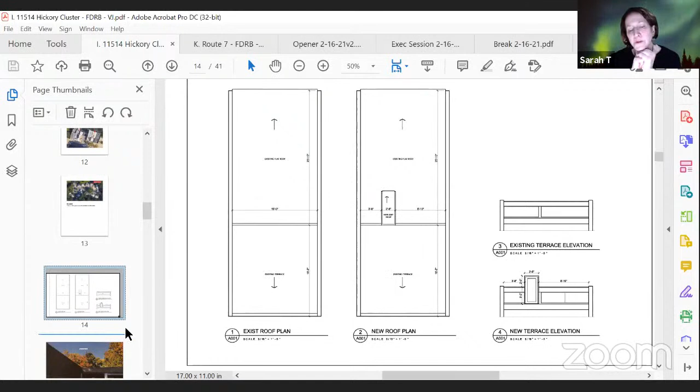So it's the fire hazard main concern, but this is obviously not just a way to access the roof, it's a new living space that they're creating. And our strip of 7 townhomes is arguably right now the most pristine of any of the 3 blocks, and it does present a completely different... well, it disrupts the integrity of this beautiful architecture, and I don't think it was carefully done. But like I said, that's the main concern.

Well, I said it, I'm the house with the red door. Yep, thank you. The next affected party I have is Marcus Holmberg.

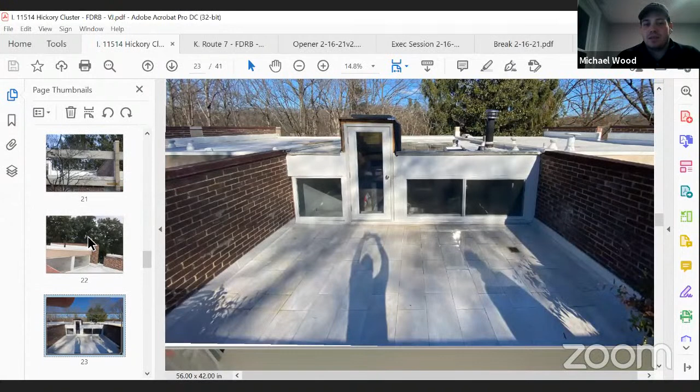When they applied the tile on the roof, did you guys re-slope the roof at all, or did you just put down the tile directly on the TPO? No, we put 2-inch foam insulation underneath that. We did everything watertight underneath that. We put, I forgot the name, a German product, an orange thing. We did that, and after we did that like you do a shower.

Does it seem like it's draining better? Because a lot of the pictures still show water up there. Is that water in this picture here or no? I don't know, probably it's a reflection, but I know the second roof is full of water. I guess I just want to make sure the improvement you're proposing is actually working, versus just an aesthetic standpoint. I see that water, but if you scroll down in that picture, it's probably just a little bit there, seems like there's water still sitting. Yeah, just the rain that day.

I don't know, so to me it's becoming a little bit more of a safety hazard up there if that tile is slippery. Just my 2 cents, but that's more of a safety concern.

So I do think what's tricky about approving a patio up here is that the original design didn't include a patio up there. There are beautiful upper level patios in Hickory Cluster, and I know there's some in Waterview next door, so it's not unprecedented in the area. But I think what's tough is from an access for maintenance standpoint, it's maybe okay, but it's a little tricky because then is everybody along your road going to add upper level patios, and does it create a domino effect where everybody now wants to start adding a door? So I think we're just trying to be safe on what we approve, because it could aesthetically affect the whole entire row if everybody starts putting these little pop-ups. This is also designated almost for landmark status from a historic standpoint. I know it's under the survey process right now with the county for being a historic property, and something like that wouldn't be approved on a historic property. So that's just my 2 cents on it.

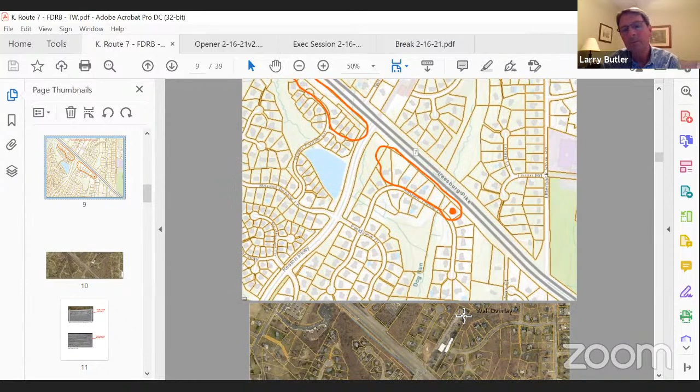So the application is for the tree removal and the installation of the sound walls. You have the design of the sound walls in the packet—the dogwood imprint faces the road.

For those of you who have been up on Route 7, you can see the piles going in on the northern side of Route 7 for the wall installation. This is a shot looking to the west, and as you can see, there's a gas pipeline there. Most of the area is already cleared, so the tree clearing is really just a little bit to the left of that picture, in the center of the frame.

There are a couple other incursions for a Dominion Power easement, as well as a Fairfax County Water Authority easement along that same stretch.

On the other parcel, the sound wall is way up next to the road, but they actually have to do some drainage improvements because there's a creek that runs through here. So the major incursion on the RA property here is to provide drainage improvements for drainage coming off of Route 7 and the improvements.

I'd ask Ryan or Michael if they want to chime in on any further details, but essentially it's for the tree removal and the sound wall installation, the details of which you have in your packet. Hey Larry, this is Ryan Mara with Shirley Contracting—hello everybody.

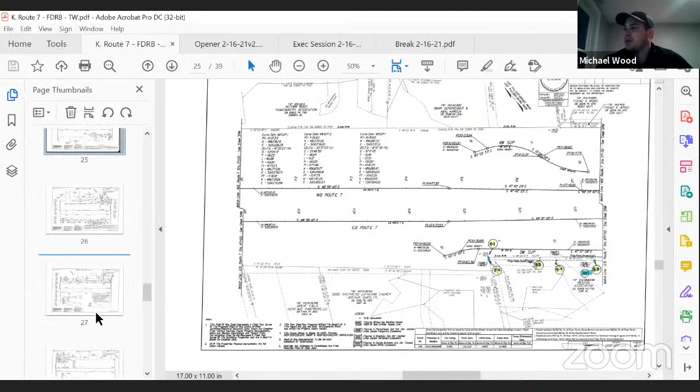My question is going to die on that where it turns up Reston Parkway, and we have our current monument sign. What's happening there and how that's affected? This picture shows it well. The wall turns at maybe a 45-degree angle, roughly—I can't quite tell, maybe 60 degrees—and it comes up Reston Parkway, or south on Reston Parkway slightly, where our sign is. What's the game plan there? What's the thought? Are we relocating that sign? Are we getting a new one? How are we doing it?

I'll let Ryan or Michael answer that question, because that sign has actually been for many, many years in the state right of way. Oddly enough.

So does that mean they get to keep it? Michael, are you aware of the sign? Because the wall is going directly through the sign. Michael Pruitt with VDOT—it is located within the existing right of way.

And are there plans to reset it, relocate it? Let me ask you this, Larry—does Reston Association have a permit to be within existing right of way? Are you aware of that? I honestly don't know, because we inherited that from Reston Land Corporation. I'd have to verify that. That would be the question: if the Reston Association has a permit to be within existing right of way, and Michael Pruitt can chime in on that as far as being able to relocate that sign if there is a permit.

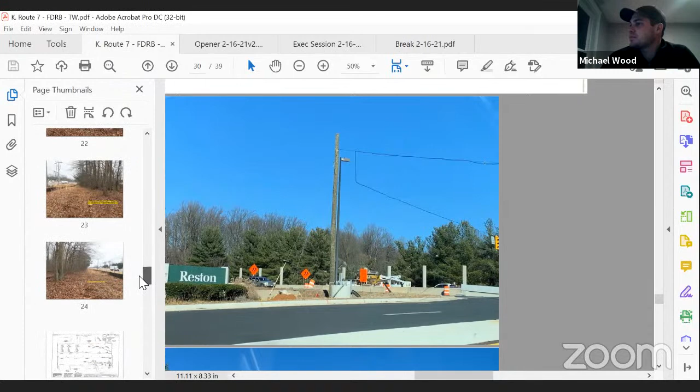I was curious in terms of the wall selection, the actual panels that we're using. I know we're evaluating this evening a small section of the larger project—is this the entire run? Is this what's being used along the whole stretch? Yes, Mike, this is the project-specific design, and it's used for the whole entire stretch. Okay, thank you, sir, appreciate that.

That's it for me, Mike. Dan, did you have any questions? Just an extension of Michael's—would there be an option to change the panel out of curiosity, or is that it? No, there's no option to change it. No, this is the premier of noise walls, and this is what was selected for the corridor. The only little exception is right as you get up there towards the toll road, Jarrett Valley, where we have to do a 50-foot, 100-foot tie-in to match their existing wall. But other than that, this is the corridor-wide dogwood panel.

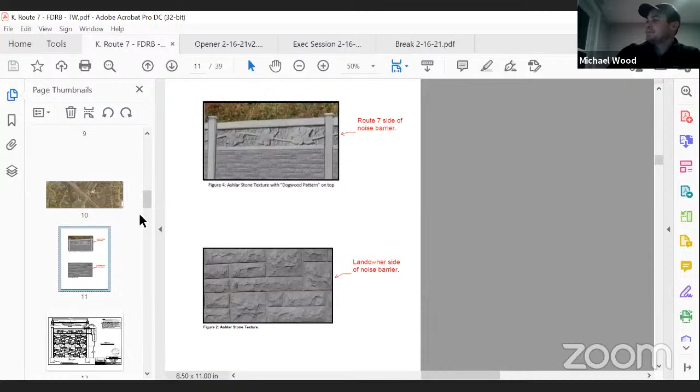The only other place the dogwood panel has been utilized is on Route 606. I thought I saw this on 28, when I was driving south on 28 to Manassas, kind of right in the Centreville area. Yeah, they have taken that, but they have it dispersed, every 5 to 8 panels or so. We're using this continuous. That was going to be my question, because when I was driving up 28, it seemed odd that it stopped, but I'm glad you addressed that. So this will be continuous the full stretch of our property, and again, there's only one other place that's been done, and it looks very nice.

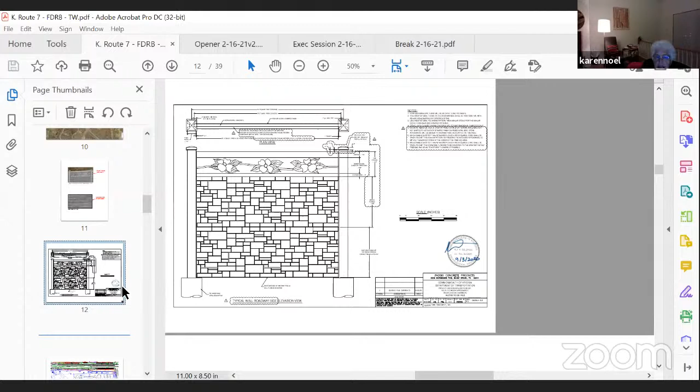Karen, did you have any questions? I'd like to understand some of the things on the drawing better. I'm assuming that the panel we're looking at now with the dogwood flowers is represented in the plan by the heavy broken green line that's close to the road.

Is that correct? I think it depends on what plan sheet. Do you know what page you were looking at? No, but it was the plan that shows everything that's on it. Larry, I think page 13. Yeah, there we go. And also, I would like to know what the potential noise barrier is.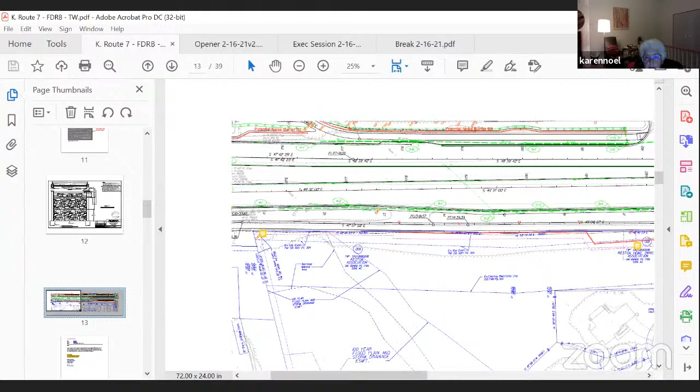The reason it says potential, and there's no potential anymore, is when we have a design build contract, there's a preliminary noise study performed by VDOT and their consultants prior to bidding the project. Once the project is awarded, we do a final noise study to confirm what was done previously. That's the reason on exhibits it says potential, but that potential can go away because these are confirmed and final.

Okay, so but the green broken line, is that where the dogwood panels are? No, it's going to be the red line. That's where the noise wall is going to be.

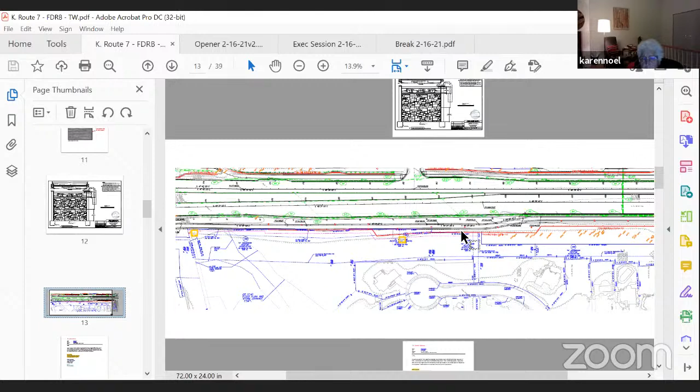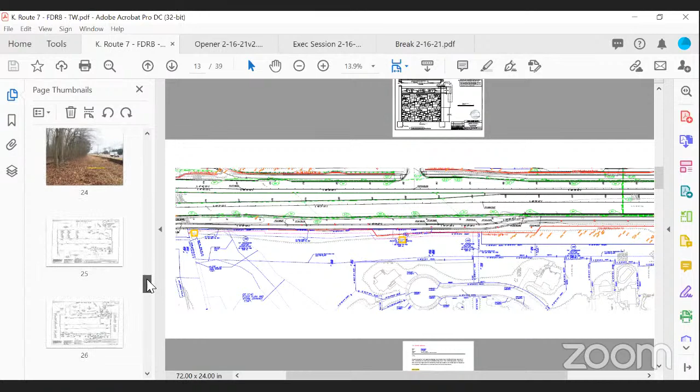And will there be any lights at the intersection for any kind of traffic reasons? You mean roadway lighting? Yes. The roadway lighting that's currently at Reston Parkway will be replaced with new roadway lighting, so it will just be replicated with new LED lights and poles, and they will be colored the Reston brown.

And will they be in the same locations where they are now? The poles? Pretty close. We're moving sections of the road out, so it's very similar — it's the same illumination pattern. The poles won't be in the exact same location. The mast arms and lights will be adjusted so that it looks the same; it's just the poles will be in a slightly different location.

Do you know what color lighting is provided on those — white light or? No, I don't know that I've seen that description. It's strictly that it's LED lighting, which is more energy efficient, longer lasting, and so forth. We can certainly find that out. It's the Fairfax County standard. The only difference with your intersection versus the rest of the project is that your poles will have the Reston brown color.

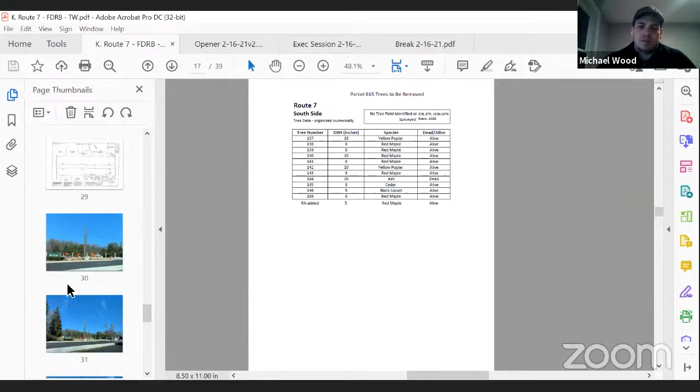Well, I appreciate that. I think the county exterior lighting standard is either 3,000 or 4,000 Kelvin, which is cool — not orange. Well, that's more warm; 3,000 to 4,000 Kelvin is warm. That 4,000 gets cooler, but at least it's not an unrealistic color. Yeah, the whole corridor gets upgraded to the new LED guidelines.

So there's no replacement of any plantings, right? That's why they have to be taken out in the first place.

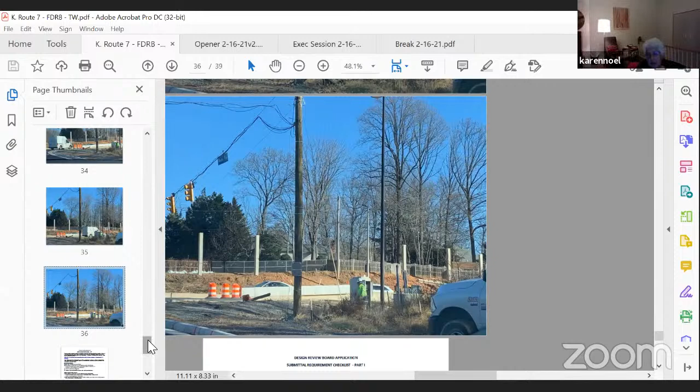Would you repeat that? I'm assuming there won't be any replacement of trees that are taken out, because you don't want them there to start with. Ever? Well, they're in conflict with the proposed project. You don't really want them there, period.

It's that they can't be there. They're in conflict, whether it be the wall. It's not that we don't want them - some of us want every tree - but it doesn't belong in the project, because the project needs to work.

Yes, ma'am. I guess where Karen's leading is, because of the easement, is there no chance we could put plants back where we're having to remove the trees? The wall is going to impact the growing ability - it's going to be all understory, and there's no way for anything to grow. Is that kind of the reason why there's no replanting?

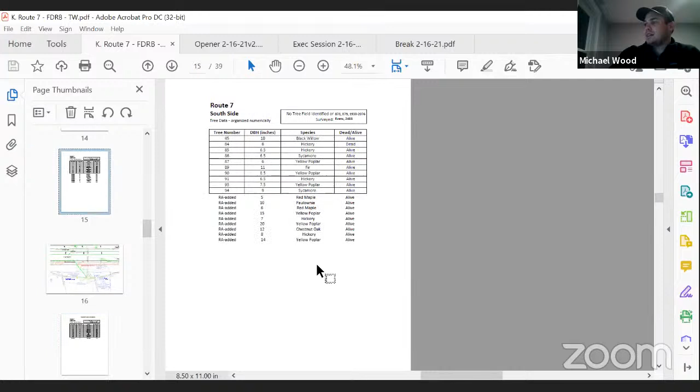Normally in Reston, we require replanting if there's a big tree removal such as this - we'd like to see some replanting elsewhere on the property. However, this is a unique situation because it's our property, so it's a little weird. I'm assuming there's financial compensation that RA is receiving for the easement. Maybe we can allocate that to some additional trees, or helping to relocate this monument sign, or whatever it be. But I think that's where Karen's question is going.

Yes, thank you. So Ryan can speak to the compensation portion of it - is that a fair statement? So Ryan, for this 10-foot easement, or 10-foot disturbance area behind the wall, that's the majority of where these trees are having to be removed, correct? That's correct, Michael. And that 10-foot is definitely required, right? There's no way you guys can work your way around it - you need to clear that prior to getting started so your equipment can have proper access.

And that 10-foot is a maintenance easement, so 20 years from now, if VDOT needs to go in there and maintain the wall, they've got the area and easement rights to do that. Okay, that's the question I was after - is it in perpetuity? Correct. Yep, that is a permanent easement. Just like any other utility easement. Correct. Okay.

Okay, Karen, do you have anything else? No, thank you. Okay, Scott, did you have any questions? No, thank you. Actually, what's the average height of one of these precast panels? It varies - the minimum is 13 feet and it goes as high as 18 feet.

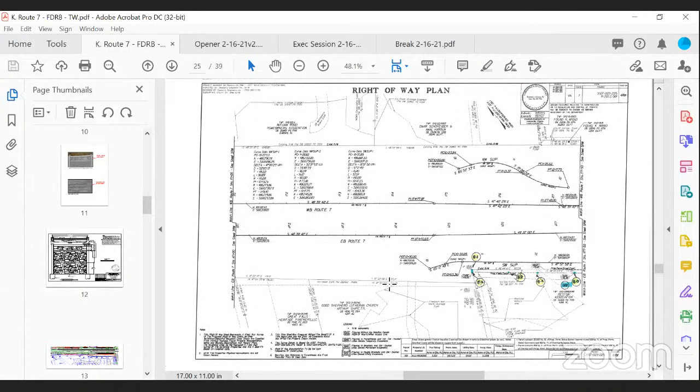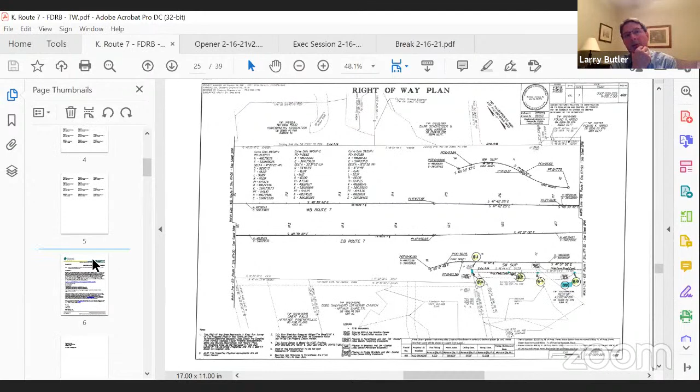Okay, thank you. Michael, do we have any affected parties on this application? Well, that's the thing - no, it doesn't seem like anybody responded, right, Larry? We don't have any affected parties except yourself as RA. I guess you're the applicant, so you're not an affected party. Yeah, after the letter went out with my phone number, I got a call from one member who I called back twice and never heard back from, and then I got a call from another resident who had not been notified but was just curious about the project. I sent her to the Connect Route 7 website and said once you take a look, give me a call back if you have questions, and I didn't hear from her.

We show the Reston properties that are affected. Now, does the wall continue past, let's say, this east side where there's that final red dot? Does the wall continue along that? It's just not on RA property, so that's why it's not part of this application? Or was it deemed the noise isn't going to affect that other house that's part of Reston? I was just confused at why the wall was stopping there, or is it continuing?

It's just not on RA property. Yeah, it's within the eastern portion, Michael - it's all within existing right of way, and it continues eastward. Gotcha, okay. So it is continuous, though, I guess is my question. Correct.

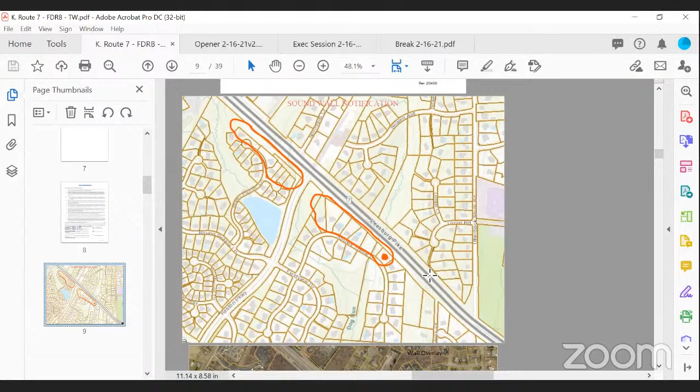Let me see, if you go to slide 10, maybe the roll plot one. No, it's not that one. Let me see, the one with the colored line. Yeah, I feel like slide 13, that one would be best. Yeah, if you scroll out of that one, if you would, please.

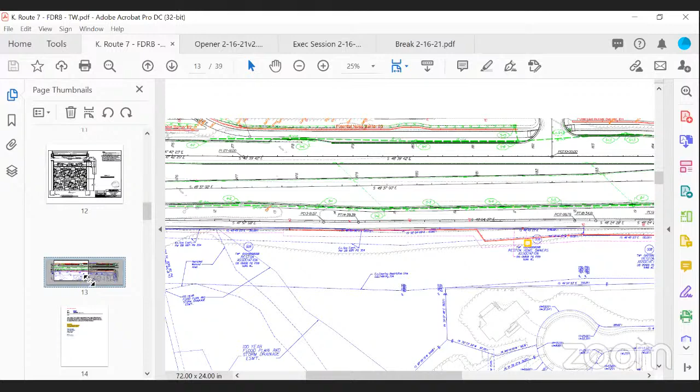As you can see, if you look at the Route 7 road, you'll see these numbers, and that depicts every 100 feet. If you scroll a little more, 100 feet equals about 1.5 inches there. So it looks like you're well over 100 feet for the most part from the proposed wall, with additional footage beyond that, roughly. Okay, thank you.

All right, would anyone like to make a motion on the application? I'll make a motion that we approve the application as submitted, with the following amendment: that RA try to preserve the sign and look into relocating it, working with VDOT to still designate our entrance with appropriate landscaping plantings around said sign as part of the update to where that sign location is.

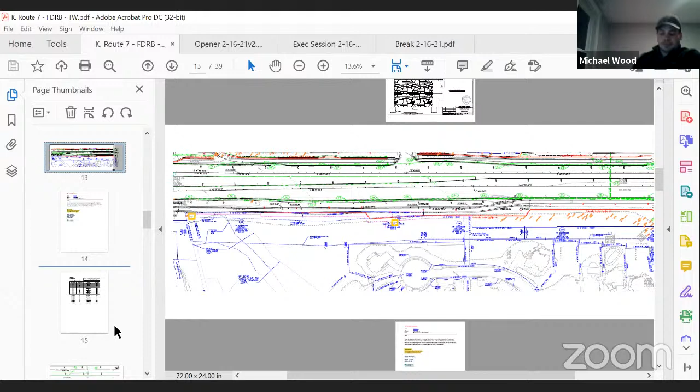I'll second. We have a motion, we have a second. Is there any further discussion? No? All right, all those in favor say aye. Aye, aye. Any nays? Any abstentions? All right, motion passes 5-0.

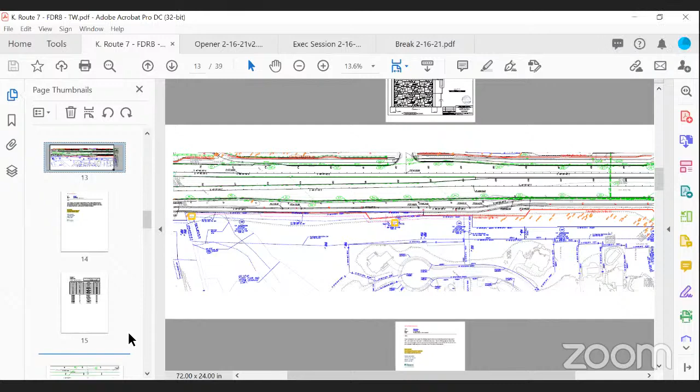One question I actually just thought of: are we going to get a new stoplight there, with the new cantilevered poles versus those strung lights? Yes. Okay great, I figured there was, but I just wanted to ask. Okay, great, thank you guys. Thank you, appreciate it, thank you for your time everybody. Thank you, Larry, take care.

All right, so it looks like we have an affected party status item to discuss, presented by Cam. I'll try and make it quick because I know we're almost at 10 o'clock.

I've been here since June, and I've gotten a lot of responses related to the Reston Association's affected party resolution number 10, and some concerns related to that resolution. It's a little confusing, I still think membership doesn't really know what affected party means. So sometimes they'll check the box for affected party when they really just support the application, or they don't have anything to include with the request or a statement to provide.

In looking back at some of the meetings we've had, there have been concerns related to the DRB recognizing affected parties that have not followed the resolution, which requires a statement to be provided. So staff is currently looking at the resolution to see if there's a need to clarify and redefine some of the things you all have been reviewing when you review applications.

For example, currently there's no stopgap in terms of accepting an affected party statement from someone who would like to be an affected party on an application but isn't technically required to be notified per the application. So let's take a single family home, for example: the owner is required to notify their adjacent lot, someone in view, and another lot. Well, even if you meet those requirements per the application, you could still have someone who is an affected party to the application but not notified.